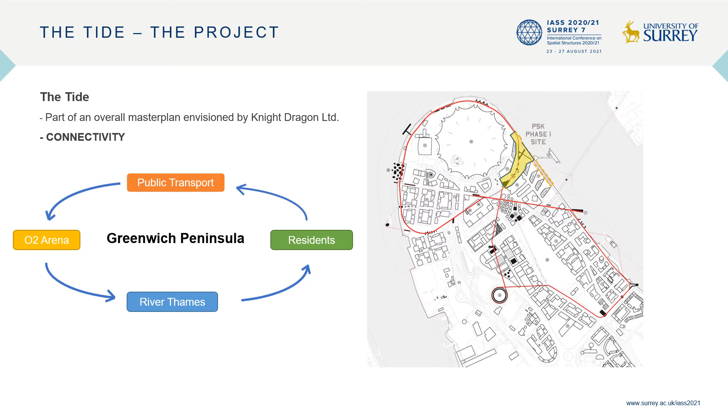The River Thames surrounding the peninsula, as well as the local residents, enables the peninsula to be enjoyed by all. This leads to the vision of a 5-kilometre link connecting together the various parts of the peninsula, with the TIDE being the first phase.

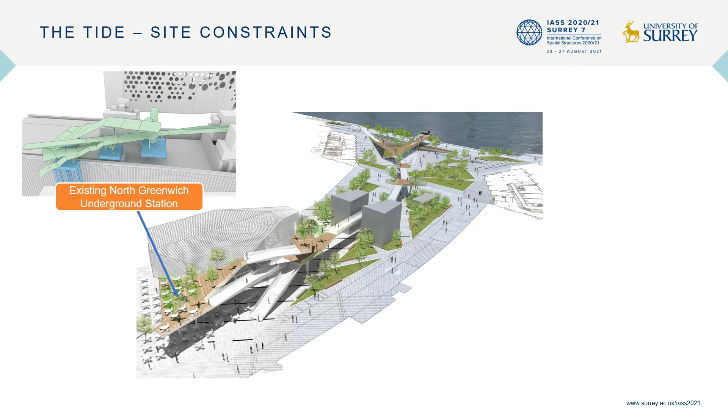The TIDE is located in an area particularly dense with existing structures: the North Greenwich London Underground station directly below, existing ventilation shaft structures, and a car park serving the adjoining residential towers. DS+R architects envisioned a scheme to lift the user experience up off the ground, away from the congested ground floor, providing an elevated highway with the essence in mind to enable users of all mobility to have access to the walkway and to enjoy the unique viewpoints.

The core of the project was to enable a full user experience for all users to interact with the surrounding landscape, and therefore enhancements to the ground level through intensive landscaping was also key.

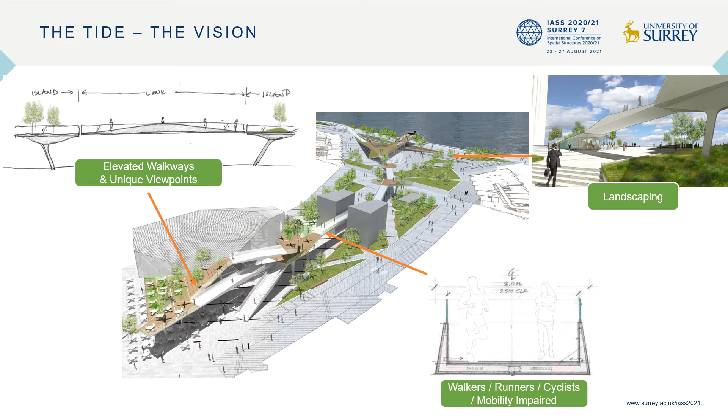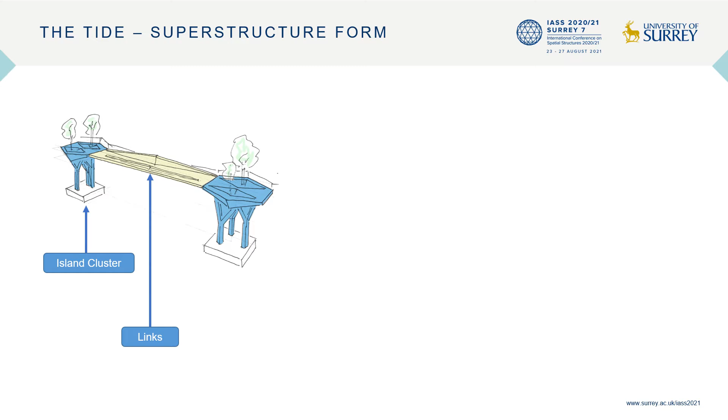The structure is formed from a simple concept of island clusters, connected together by link bridges, continuously joined together forming a walkway of approximately 300 meters. There are 7 clusters formed of between 3 to 8 islands, and a total of 29 uniquely shaped islands, each serving a purpose to provide space and to accentuate key viewpoints along the walkway.

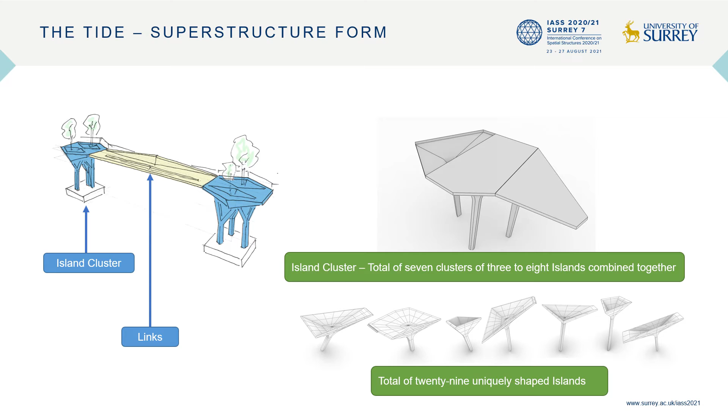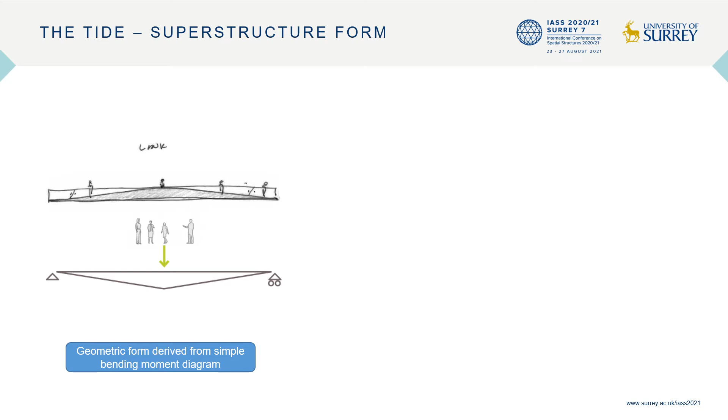The form of the link bridges was based on the principle of honest architecture. The geometrical form of the links corresponded directly to the associated bending moment profile of a link, effectively a simply supported beam with the largest moment at midspan.

A total of 8 links connect the island clusters. Though varying significantly in length between 5 and 23 meters, the links are designed as simply supported elements sat on elastomeric bearings at either end. This enabled the decoupling at island connections and allowed for free movement under thermal loading.

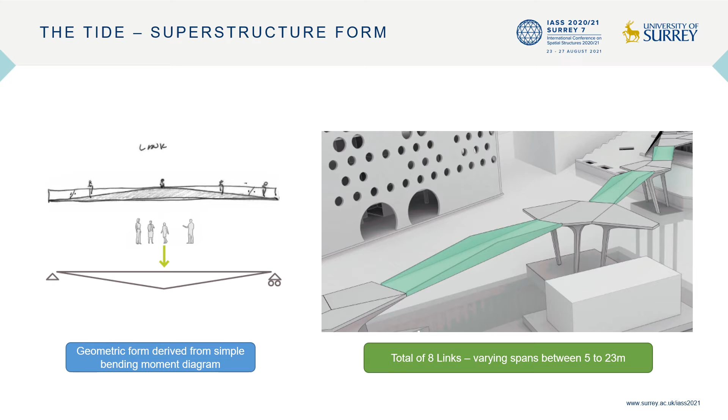Steel was the natural choice of construction due to significant benefits, including suitable construction to achieve complex interfaces with surrounding existing structures, manageable loads for fabrication, transportation, and installation, the high levels of accuracy achievable with fabricated steel elements, consistency of the high quality finish demanded by the project, and reduced site construction and installation time, as the majority of time is associated with shop fabrication off-site.

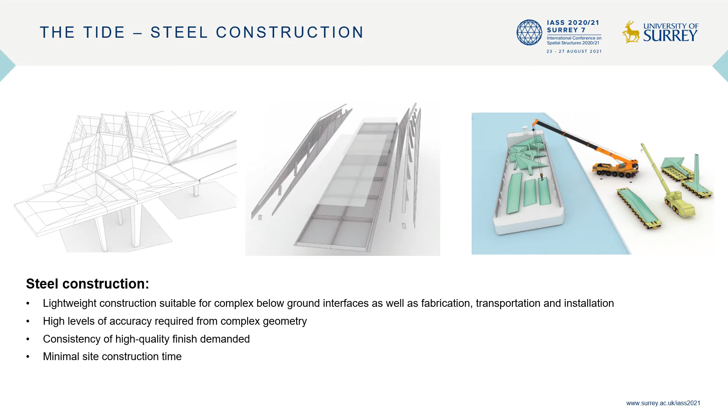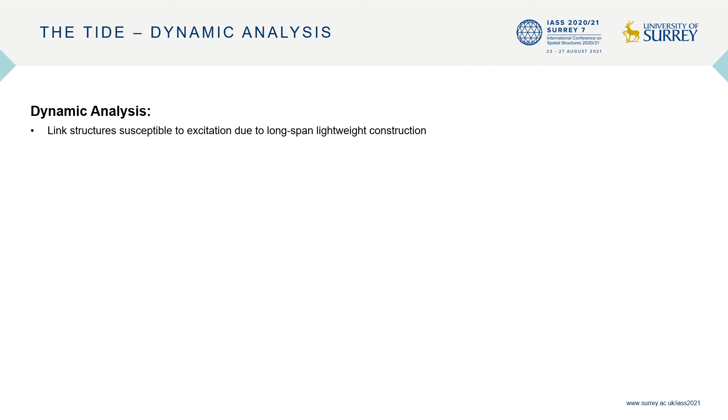It was clear during the early stages of design that adopting a lightweight steel solution would bring challenges regarding dynamic behavior. The links are susceptible to dynamic excitation due to its lightweight construction, limited surface finishes, long spans, and fully welded construction. Time history analysis was utilized in digital analysis models; however, it was key to understand and define these serviceability design criteria.

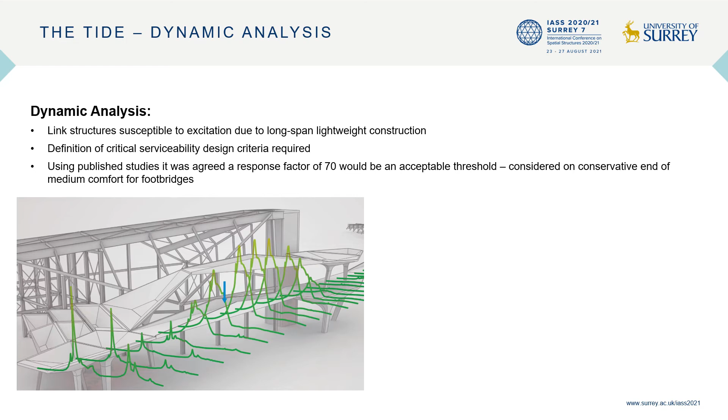No response factor is strictly codified, therefore readily available publications on dynamic response were used to advise the client. A response factor of 70 was agreed. This is considered to be on the conservative end of the medium comfort range for footbridges based on these published documents.

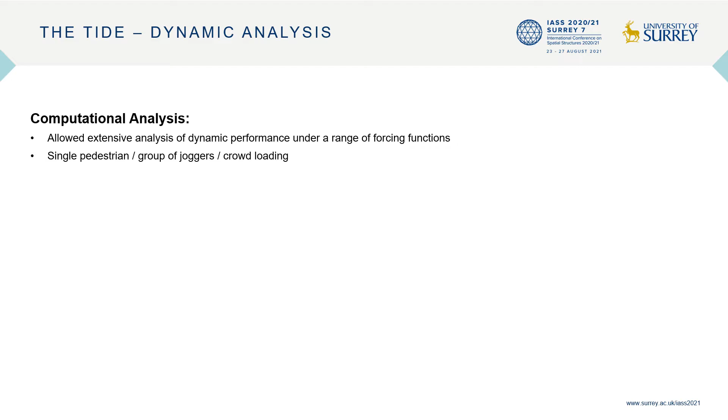Computational design tools enabled us to extensively assess the dynamic performance of the structure under a range of forcing functions based on single pedestrian, a group of joggers, and crowd loading. Using analysis models, we were able to review particularly sensitive structural elements in further detail to resolve any dynamic excitation issues.

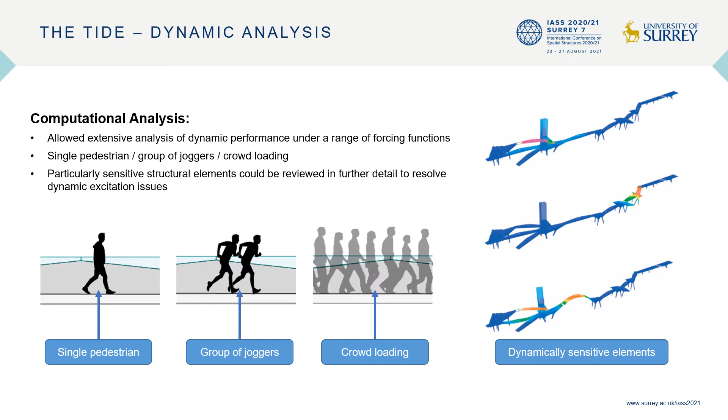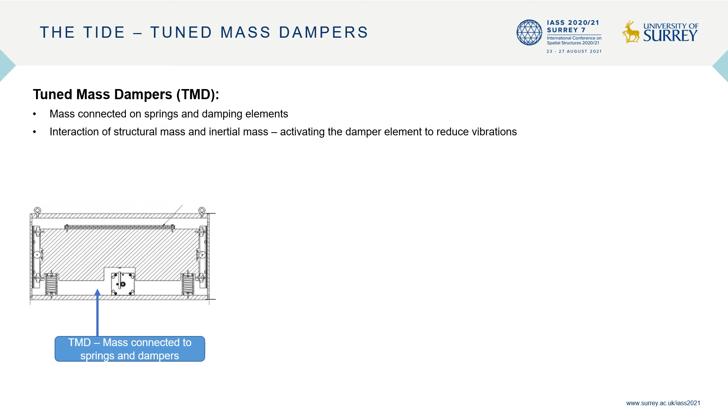Tuned mass dampers were considered a cost-effective solution to dynamically sensitive links. They are simple in construction, with a mass connected to springs and damping elements. The interaction of the TMD would enable significant reduction in the vibration response, and this was studied in depth using computational analysis models.

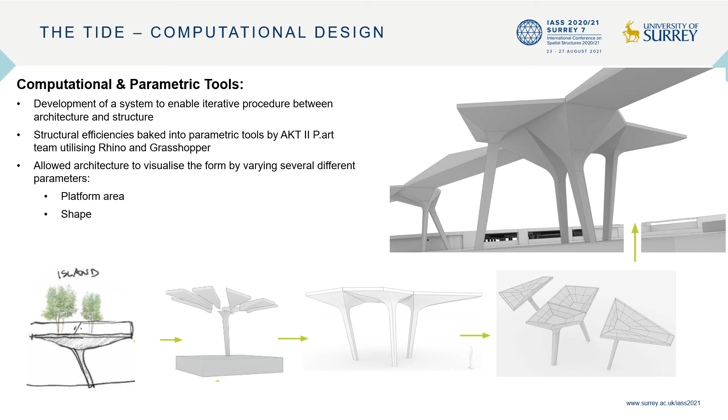Computational and parametric tools developed by AKT together with DS+R architects allowed a system of iteration to be produced, where structural requirements could be maintained, for example, stiffener number and locations based on plate geometries. This allowed the architecture team to quickly study the varying forms throughout the project and to make adjustments by refining a set of parameters, including platform area, shape, flare, tree base, and depths.

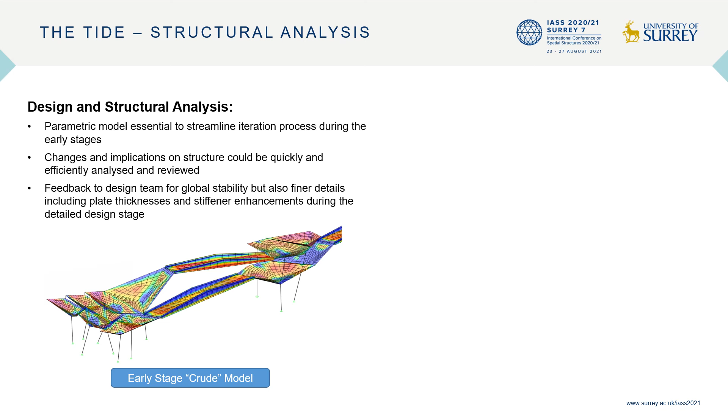Computational tools were relied upon heavily during the design and structural analysis of the islands and links. The parametric model was an essential tool both to streamline the iteration process and to enable changes to be quickly and efficiently reviewed, as analysis models could be automatically generated. This allowed for quick feedback to inform global behavior in terms of stability, to minimize forces into foundations, but also to inform changes and opportunities in plate thicknesses, stiffener locations, and numbers. This was particularly useful during the detailed design stages.

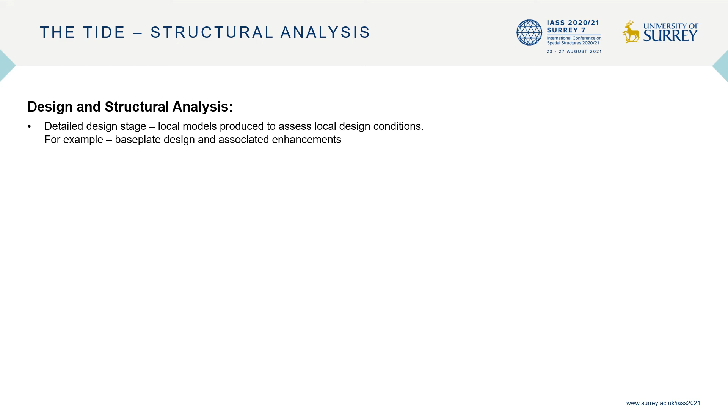In the latter stages of detailed design, local detailed design models could be produced from the parametric models. For example, column base connections were key to understand any strength enhancing requirements, such that additional stiffeners could be introduced to deal with local stress peaks.

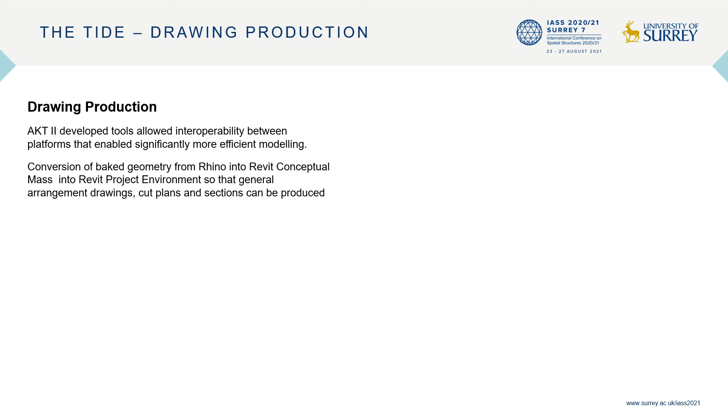The drawing production process was streamlined through the use of AKT II developed interoperable tools between platforms. Baked geometry within Rhino was transferred into Revit conceptual mass, then into the Revit project environment so that construction drawings could be produced. This included all the general arrangement drawings and plans and sections produced from the Revit model.

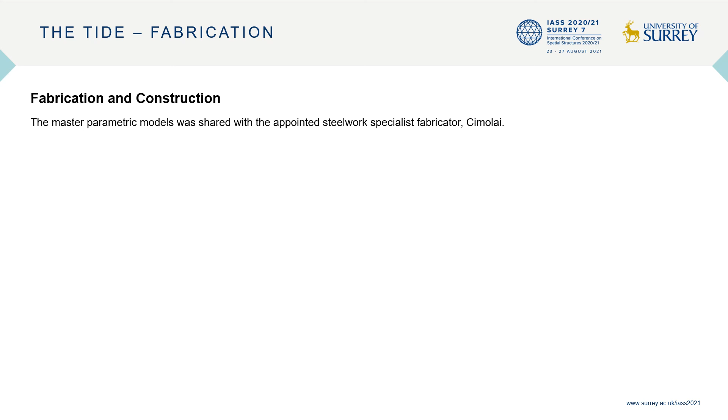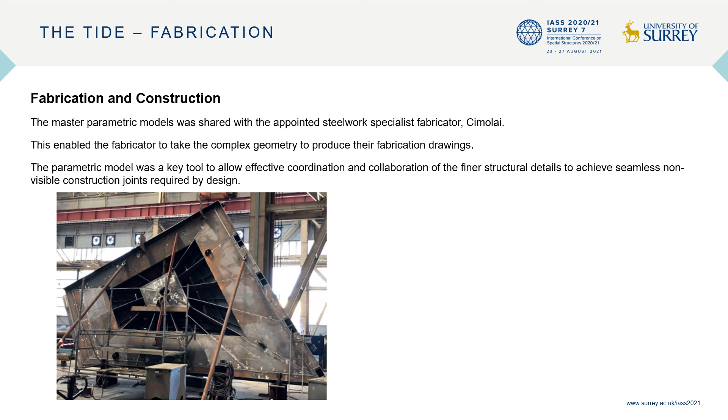Once the main fabricator, a steel specialist from Italy, Cimolai, was appointed, the model was shared to enable the contractors to tackle the complex geometry and to produce detailed fabrication drawings required for their processes. The parametric model was an invaluable tool to allow detailed coordination and collaboration for finer structural details and to achieve seamless, non-visible construction joints required by design.

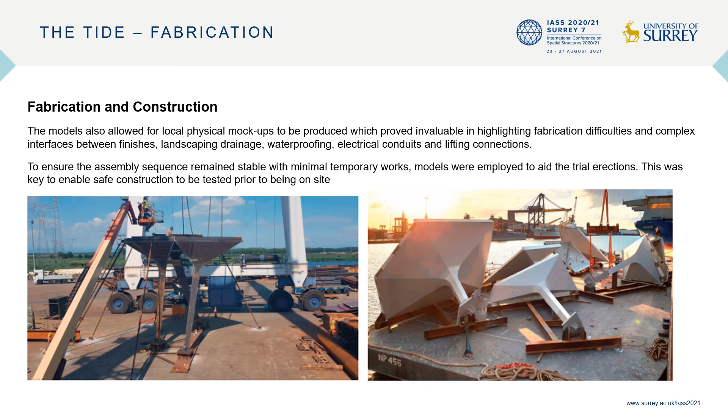Physical mock-ups were part of the fabricator brief, and the models allowed for focused mock-ups to be developed in 3D prior to fabrication. This was an extremely useful process to figure out the vastly complex interfaces between all the different trades. Due to the size and weight of these elements, installation and erection had to be carefully planned and thought out. The models allowed the fabricator to produce safe installation sequences with minimal temporary works, which were tested in Italy prior to being shipped to London.

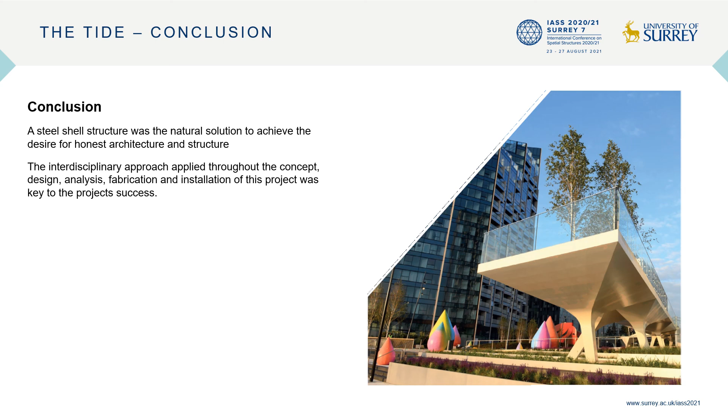To enable the realization of the architecture and the honest structural form, a steel shell structure was the natural solution to adopt. An interdisciplinary approach throughout the journey from concept to construction was key to its success. Computational tools developed between structure and architecture were a key achievement to deliver a streamlined design process. Sharing the model with the fabricator enabled opportunities to be taken while also highlighting any potential issues before fabrication.

The delivery of the project was a fantastic success, achieved by all through hard work and dedication. We would like to give special thanks to the client, Knight Dragon, the architecture team, Diller Scofidio and Renfro, Neiheiser Argyros architects, and the specialist fabricator Cimolai, as well as the design consultants who provided their technical excellence and the structures team at AKT II.